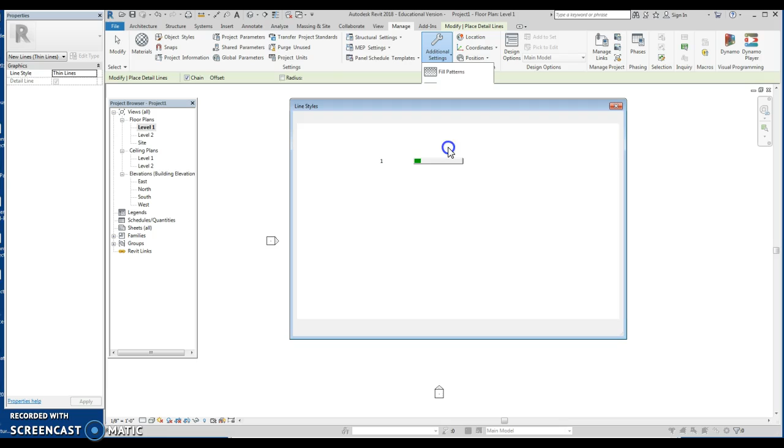Only this will show up. I have to push the plus so I see all the line styles that I have. These are all of the line styles that are already set for me. I would like to create 3 different line styles. I'm going to call it Construction 1, 2, 3. And I'm going to put one in front of them so that they show up immediately.

Watch this. All right, so New, 1 Construction. I'm just going to abbreviate it. -1, and I'm going to say OK. I'm going to create another one, 1 Construction-2, and I'm going to say OK. I'm going to create another one, and I'm going to call it 1 Construction-3. So far I've created 3 construction lines, right?

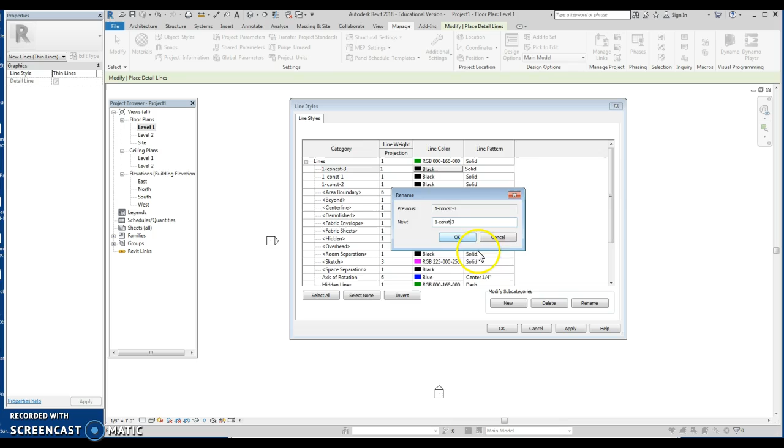So for whatever reason this didn't pop in that direction. Oh, I know. It's because I spelled it differently. So I'm going to rename that one the same way as those. So Construction. So they appear in order. So it's easy. If I need to rename things, I can go here. Right now they're all black and they're all solid.

I would like this one to be of a different color. The colors that you do not want to use are hot pink, the color when you're modifying things, orange, and neon green. Other than that, you could use any color that you want. I like to use this kind of purple. It's easy for me to work with.

Then I'm going to come back here and I'm going to use another color. It's not the same bright orange. I'm going to use this one, go a little bit lighter, and I'm going to say OK. And then I'm going to use another color here. Let's see what I like to use. Maybe this one and go a lot lighter. Maybe like this and say OK.

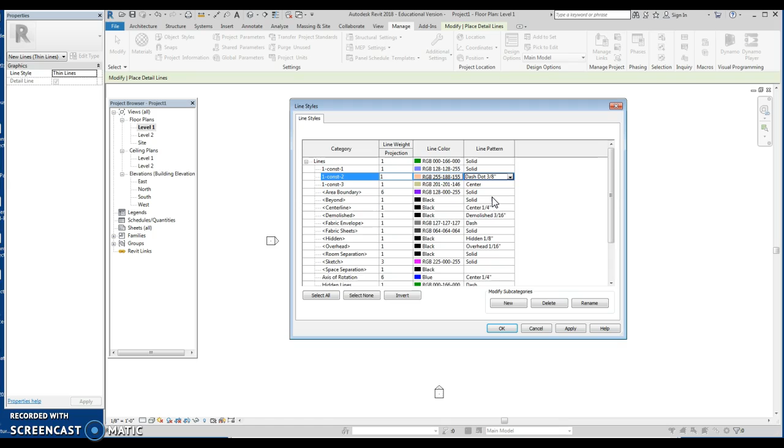And for that one, I may decide that I want to go center line. And for this one, I may decide that I want to go dashed line. And I can just go like this, dash dot, or just simply dashed. 3/8 of an inch, and I can always change it, and say OK.

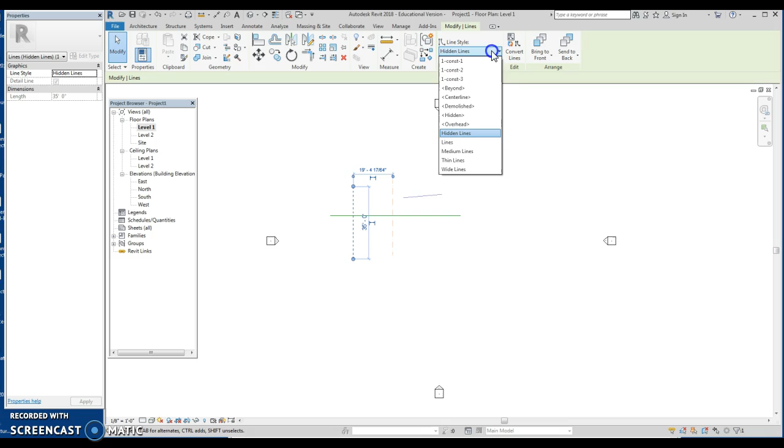All right, if I want to check my lines, I can go to Annotate, Detail Lines, and I can start drawing a line, right? Then I pick this line and I say I want to change that line to Construction 1. I would like to change this line to Construction 2, and I would like to change this one to Construction 3. You can see how I have created the 3 different types of construction lines.

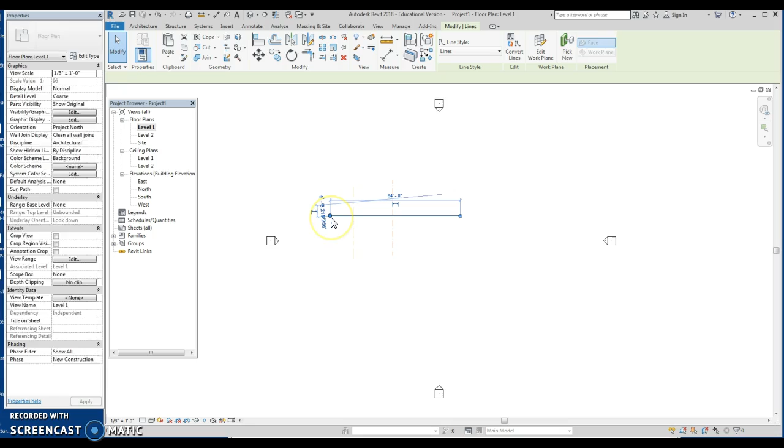Watch me going to level 2. If I go to level 2, none of those lines that I just changed will show because they're all detail lines. Now, if I take this line, can I convert it into a detail line? I probably could. So I just check to see if that's a detail line now, and I see nothing. So I go back here and convert it into a detail line again. Let's go back and see if it actually happened. Yes, it did. It shows up in level 2 because it is a model line.

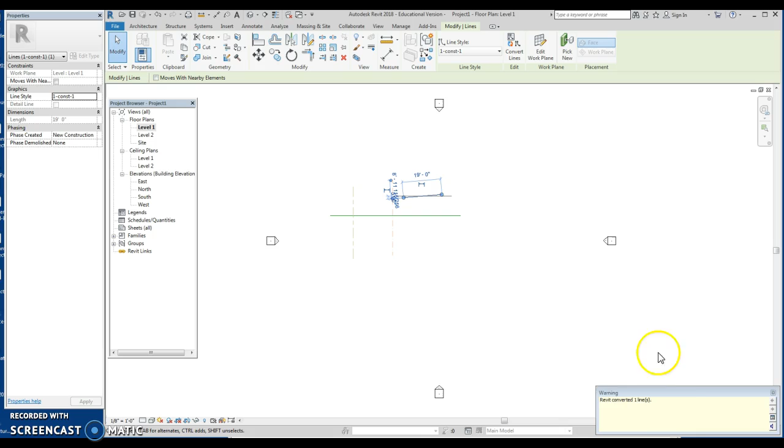So now I'm going to take this guy and do the same thing, convert it to detail line. And every time it says Revit converted the line. So these little flashes here ask if you're sure you want to convert it into a detail line or not. And then you can check it. And you'll see that was a detail line actually in the same color.

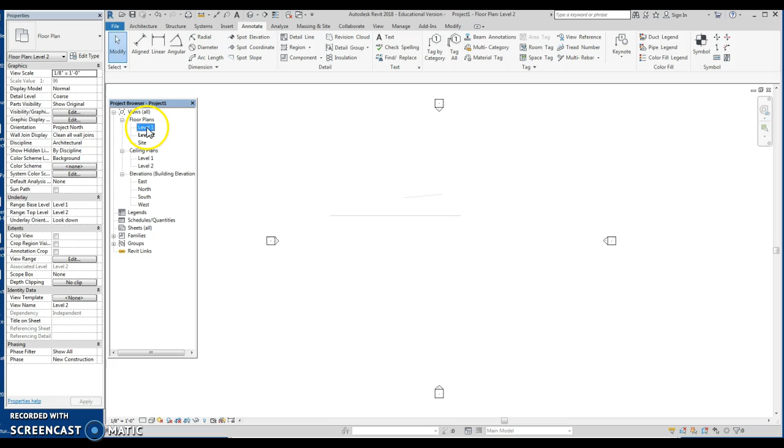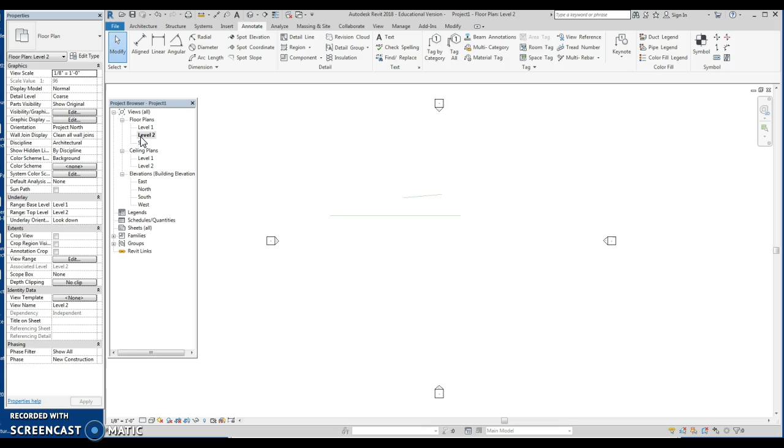So you can change colors or still keep them the same if you would like them to be in those colors. But usually, for me, it is best for my lines that are actually model lines to be the same color. So I really would like to just go to Lines, and that's my model lines. Lines is model lines, and it shows this way. That's why I said don't use the green, because that's model lines. This is it for model lines versus detail lines and creating styles.